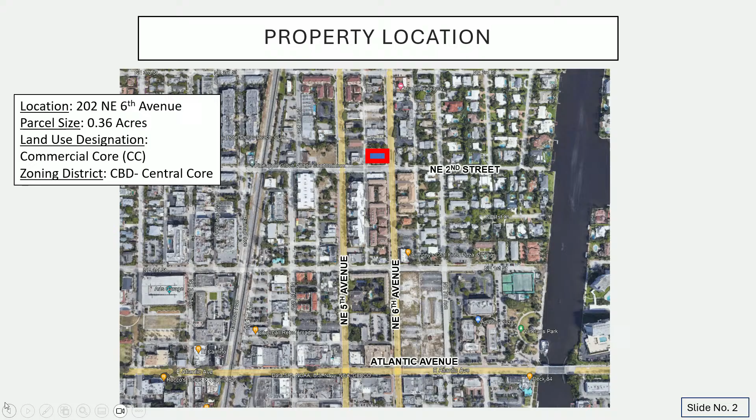As many of you have mentioned, you've driven by the site, so you're probably fairly familiar at this point, but it is highlighted in the red box on the screen. It's located on the northwest corner of Northeast 6th Avenue and Northeast 2nd Street. It's a small parcel, only 0.36 acres. It is within the commercial core and within the CBD. And it is currently developed with a cigar bar called the Smoke Inn. It's been that cigar bar for a number of years at this point. Initially, I believe it was a single family home when it was first constructed, but it was converted to commercial use quite some time ago.

And here's a graphic of the proposed project. So it would be 10 condominium units. It would be a mix of 2 and 3 bedroom units with a rooftop pool deck and amenity area, a little lounge space, space for some entertaining, that kind of thing.

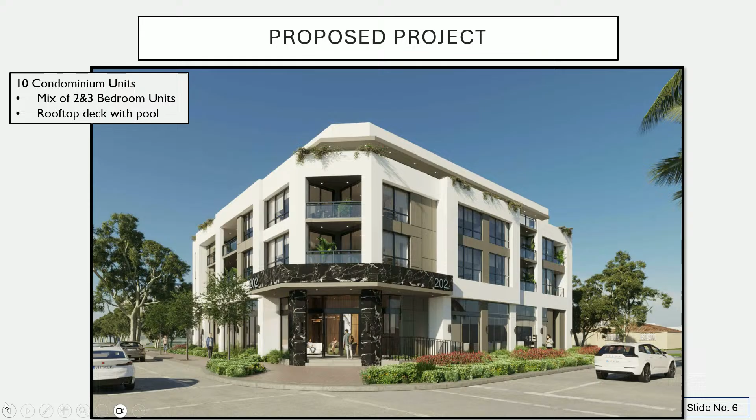What you will notice is the primary streets are activated. So on 6th Avenue, 2nd Street, you do have what looks like active spaces. You have your lobby area. Obviously, the corner of the intersection is highlighted. That's a very prominent intersection, so we're trying to pay tribute to that. And you don't have any breaks for vehicular access along the primary streets. As the code requires, we are accessing the parking and the vehicular use areas through the alley, which again is a code requirement.

So here you have the ground floor plan. The proposed site plan does meet the code requirements and the comprehensive plan requirements in terms of maximum FAR, that's 3.0, we're at 2.92 FAR. We're under the 30 dwelling unit per acre permitted density. We do have structured parking within the ground floor and mezzanine levels that provide sufficient parking to meet code requirements. We have 23 parking spaces for 10 condominium units, so that accounts for the units and guest spaces. The service functions are consolidated within the alley, which is the intent of those alleyways within the downtown areas.

And as I mentioned, we have that uninterrupted pedestrian activity along the primary streets. So as you can see, we have open windows and the ability to look inside into those lobby spaces, and we don't have any breaks that would interrupt those pedestrian sidewalks.

We are also providing lobby and stoop frontages with recessed entries to meet the frontage type standards.

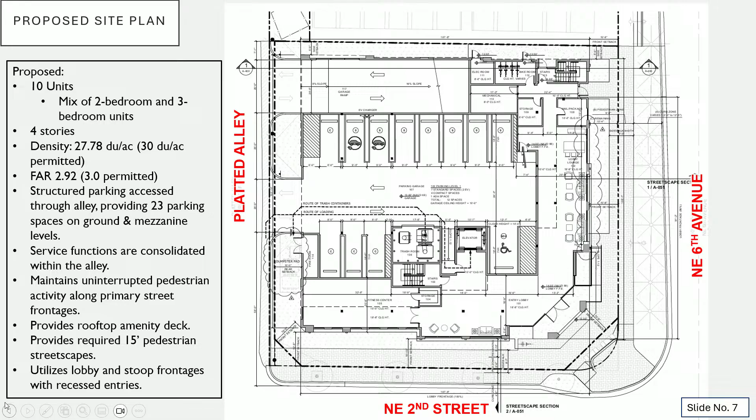In terms of the streetscapes, we are required to provide a 15-foot streetscape comprised of a 4-foot curb zone where you have your plantings, light posts, utilities, and that kind of thing, a 6-foot wide pedestrian clear zone for your sidewalk, and 5 feet of remaining setback.

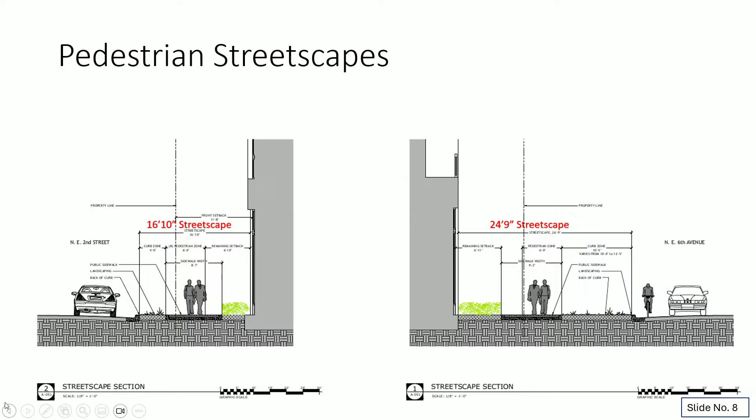We're actually exceeding those requirements on both street frontages. On Northeast 2nd Street, instead of 15 feet, we're providing 16 feet 10 inches, and we actually have 24 feet 9 inches on the Federal Highway Northeast 6th Avenue frontage.

Again, the staff report goes into detail, but we are meeting all of the requirements of the CBD, of the form-based code, in terms of the development requirements, the required bicycle parking, all of those standards, the setbacks, the greater setbacks as you go up in floors. All of that is being addressed and met through this project.

And then in terms of elevations, we did have the masonry modern style approved by the City Commission, the use of the style, and I'm going to have our architect come up and speak to some of the particular details about the style itself.

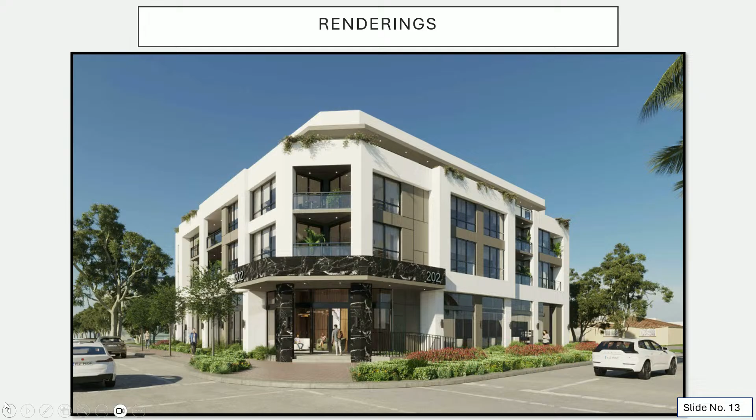Christina pretty much went through the first part of my blurb describing the building, so I'm just going to talk about the style a little bit. As she mentioned, this board did approve the use of the masonry modern style in May, as did the City Commission approve the use as well in June.

So the design highlights the solidity of the building as a prominent mass with carved out terraces and recesses for fenestration. The terraces are employed to create shaded outdoor living spaces for the residents and opportunities for them to also connect more with the neighborhood by being outside.

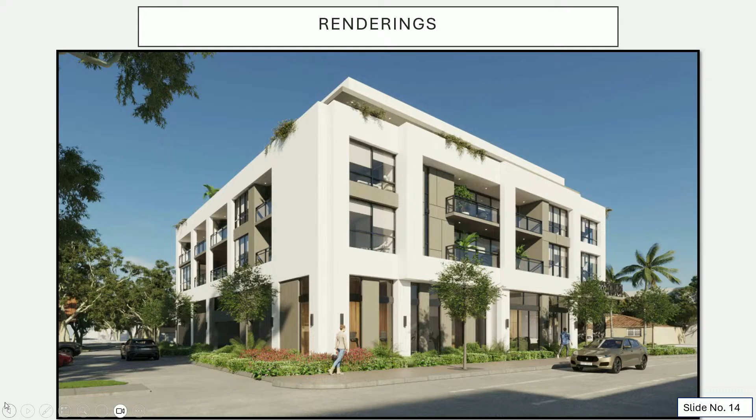These terraces and balconies are utilized on all 3 street-facing facades. Let's see if the next one shows. As you can see, this is 2nd Street and the alley, which also has those terraces and balconies.

Whoops. Sorry, I'm a newbie.

And as was mentioned, the intersection is really accentuated by an expansive projecting overhang to really accent the entrance of the building, and also to sort of anchor the corner and the intersection in the CBD.

So the color palette and the open terraces sort of pay homage to Delray Beach's urban fabric. The integration will ensure visual compatibility with buildings in the vicinity, as was covered earlier. The style has been carefully designed to complement and enhance those existing buildings, considering their scale, proportion, and materials also. We believe that the good proportions and elegant detailing and this sensitivity will produce a beautiful composition and elevate the architectural expression in the area.

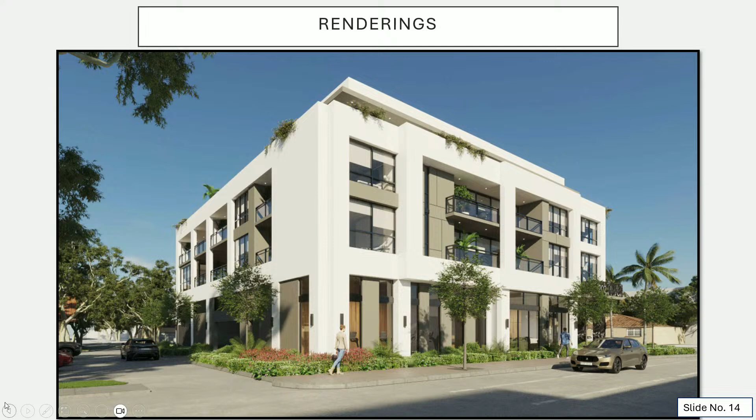And just in conclusion, the staff report details how positive findings can be made, again, in terms of compliance with the comprehensive plan, which I touched upon, concurrency with respect to traffic, water, sewer, all of that has been met. And with that, we would be happy to answer any questions that you may have this evening, and I appreciate your time. Thank you.

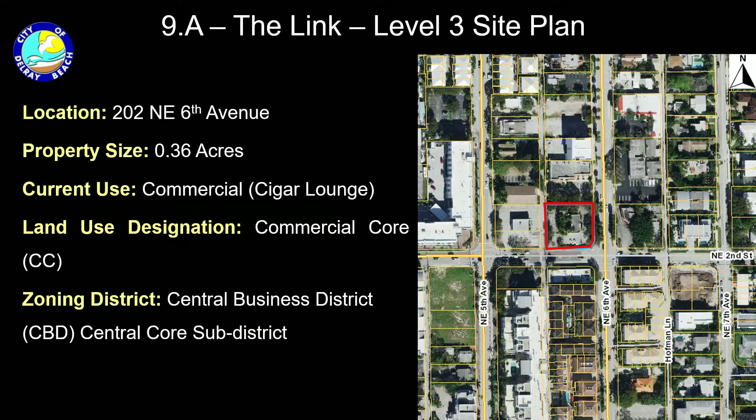It's an aerial view. Again, like the applicant mentioned, this is an old structure, constructed first as a single-family dwelling in 1936, very old, and then it underwent some changes, and more recently has been a cigar bar. Last June 2025, the City Commission approved resolution 107-25 authorizing the masonry modern style.

The masonry modern style required the approval, the recommendation of approval from the PZB board to the City Commission to authorize the style. However, the design itself is within the authority of, and is in front of, the board today. So the style is approved, but the design you can make comments directly towards.

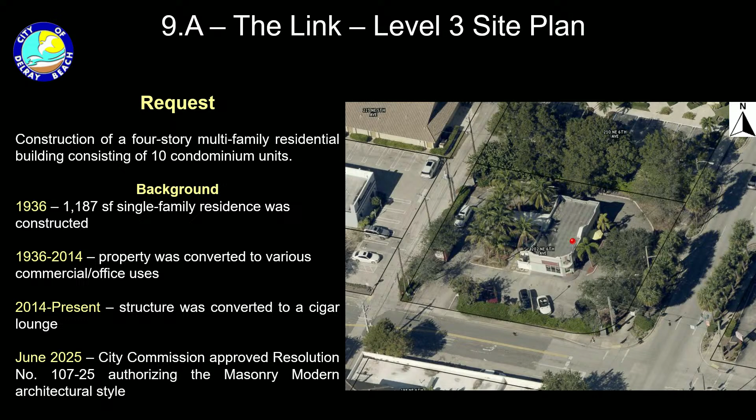Location, across the street. I just want to highlight that across the street from Northeast 6th Avenue, there are new townhouses, also designed by the same architect, known as the Edge of Pineapple Grove.

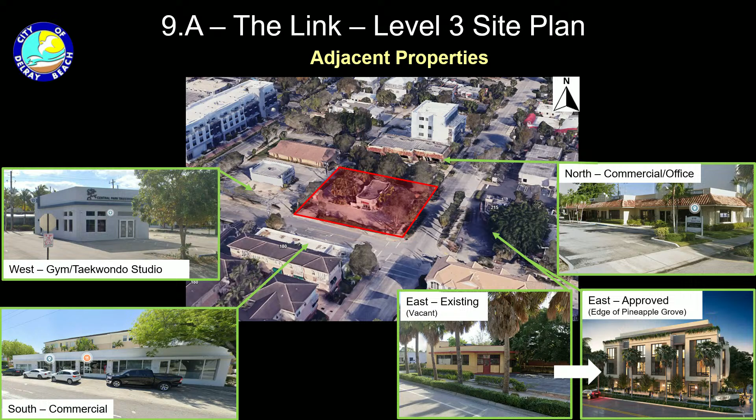The applicant showed the context, so I'll skip through that. The proposal is 4-story, 46,000 square feet, multifamily, 10 dwelling units. The first story and the mezzanine stories are dedicated for parking. Second, third, and fourth floors have the 10 dwelling units, 2 and 3 bedrooms, with a rooftop pool deck.

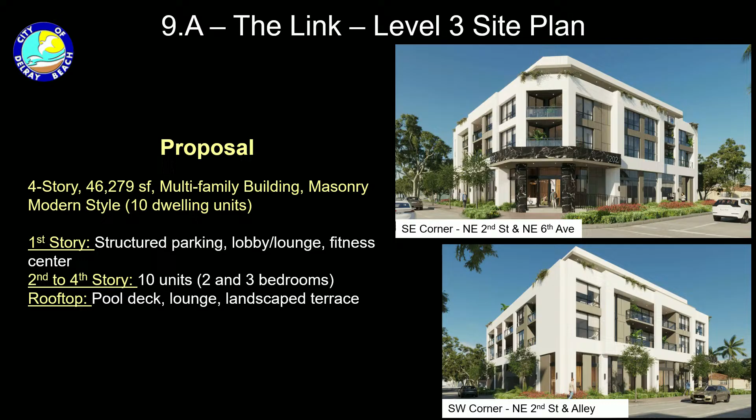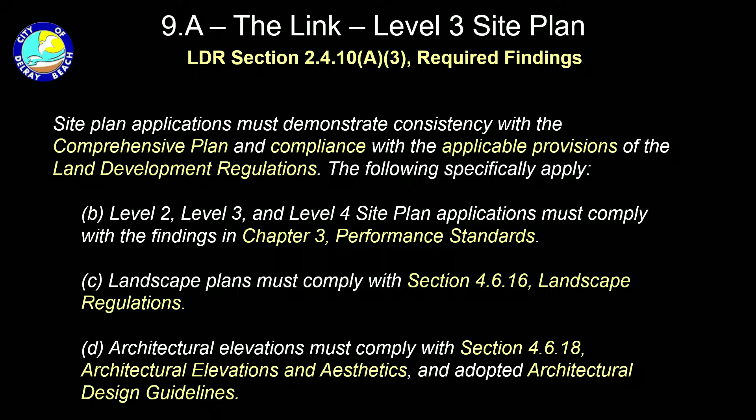It complies with the code requirements. Chapter 2.4.10 sets the review criteria. All level 3 site plan applications need to meet the chapter 3 performance standard findings, the landscape findings in 4.6.16, and the architectural elevations requirement of 4.6.18. We'll go through it quickly so you can see how the project complies.

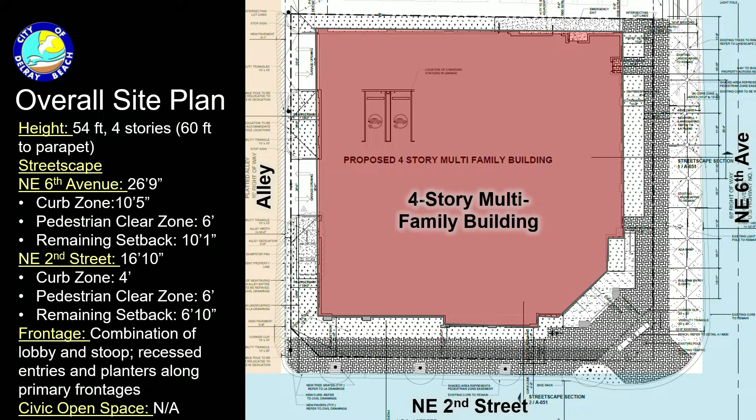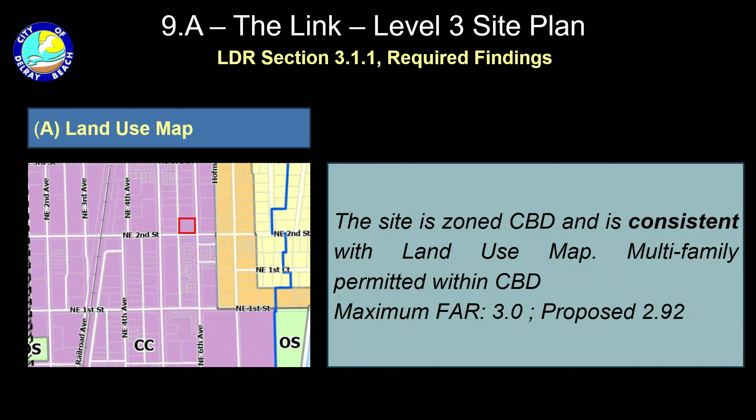In terms of the land use map amendment, the project is consistent with the land use map and the FAR is below the threshold. It meets concurrency. The school SCAD approval is required prior to site plan certification.

Section 4610 requires 2 loading bays, and the project does not provide any. The applicant submitted a request for the board — it's within the board's purview, the board's decision, to waive the requirement if the justification from the applicant is accepted. The applicant mentioned that the loading will happen in the alley behind, shown on the screen. So 2 are required, provided is 0.

In terms of architecture, the style is masonry modern, and the implementation of the style is in front of the board. It's basically masonry with a light color palette, representing simplicity. Same style, same design was almost presented to the PZB, with no major changes, and also to the City Commission, except for the canopy over the entrance with a little marble texture style. This is new.

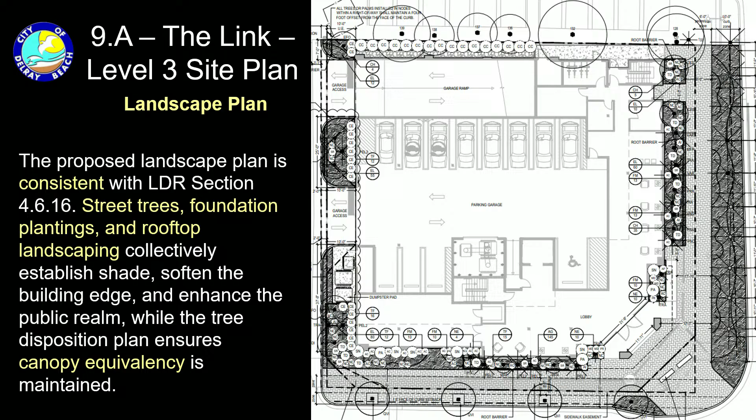In terms of location and landscape plan, it complies with the landscape plan. The landscape architect, the landscape planner, reviewed it and deemed it compliant.

In conclusion, the whole proposal exhibits the defining features of masonry modern: simplicity of form, rational massing. Given the building's highly visible location, it serves as an anchor on this corner, like a landmark as well. The style, again, is masonry modern, enhancing the cohesion of the context.

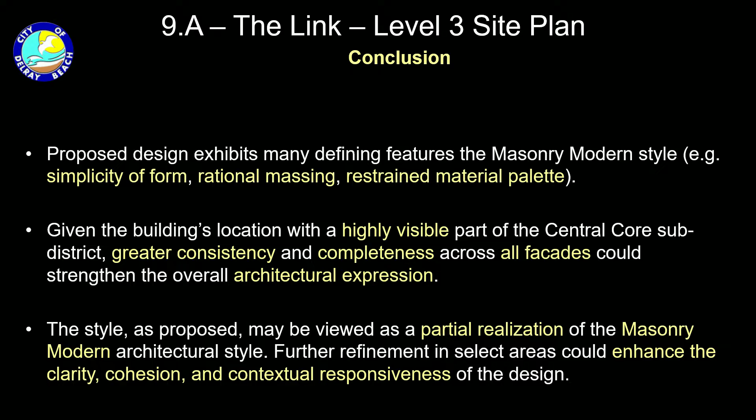It was presented to the DDA on July 14 and recommended for approval. The Planning and Zoning Board recommended approval of the masonry modern style on May 19, and the City Commission approved it on June 17. Here are the board actions in front of you, and I'm here for any questions.

Thank you. Thank you.

At this point, are there any members of the public who wish to speak? Seeing none, public comments closed.

Is there any cross-examination or rebuttal from the applicant or from the staff? Not at this time. None. Okay, all right.

Board comments, let's start with Mr. Katz. I'm curious why you changed from that brown facade to this marble front. I'm just curious about that change. Have the architect come up. I know there were some comments from a former board member about the base separation, but I don't see that — I just see a color change.

Yeah, so actually there were a few other minor changes — in this area we refined a little bit, because I know there were comments about that division from the first to the upper levels, so that was incorporated. And I believe the change to the darker palette for the entry was to make it more visible and really accentuate it on the corner and the intersection.

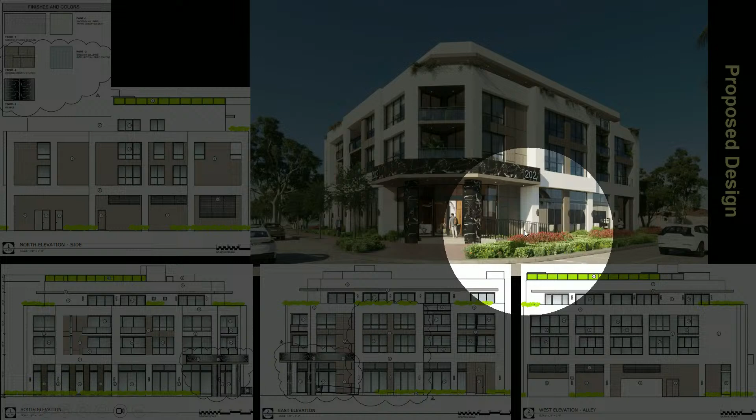Can I just quickly ask, is that like a sculpted railing kind of thing, or is it a solid piece? Above the entrance — you're talking about the black stuff on the supports for the entrance, the marble? It looks like it's almost a railing. Looks like a railing there, sorry, the black thing above the entrance. So that's actually an ADA ramp. No, oh.

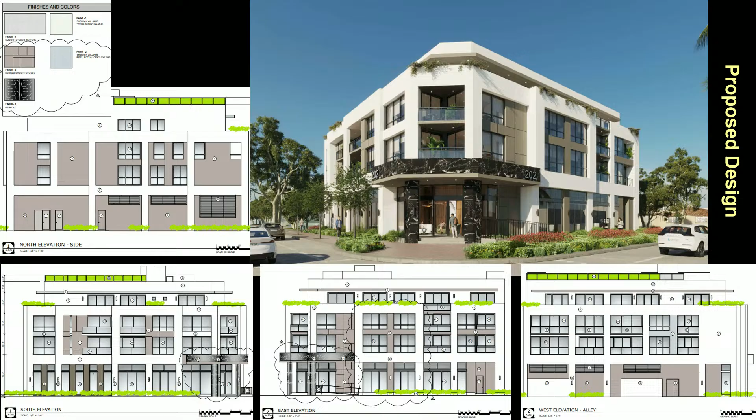Above the entrance, those are pretty much glass railings with metal on top. They're solid, not glass, not ornamental like a carved wrought iron railing. It looks like a solid glass panel or polycarbonate panel with a metal rail above it. It just looks like a railing to me.

I know you had some direction on that. I was curious if that's what you were trying to do. I don't know, I'm not crazy about the color, but I'm not going to live there, so otherwise I'm fine with it.

The only comment I'll make, in general, is to remind the city that every time we get rid of a commercial property and add residential instead, we increase taxes on our residents, because as we eliminate our commercial property base, we eliminate our most thriving tax base, and then we have to raise taxes like they had to do last night. This isn't a comment on the application itself, just in general, for the record, staff would like to try to discourage this type of change.

Is that it? That's it. So, Shard.

I'd like to address the building as well, but I want to start with the landscape plan. It concerns me in a number of ways. The first is removal of existing canopy. The second is the diameter of the plants being used to replace the oaks and mahogany that are there now. And the third is the justification for removal.

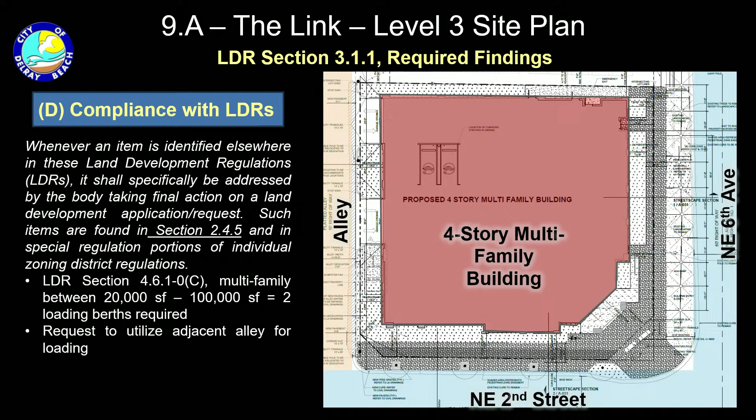I don't know if the city should address this or the applicant. I'd like to know why we're going from trees that are 12, 14, and 16 inches diameter breast height down to 2-inch calipers. I'd like to know why this design basically shows no trees at all. If you drive up 6th Avenue, you see more and more trees being destroyed. So the rendering does not particularly represent the landscaping that will be there. If we showed the trees, you wouldn't see the building, okay?

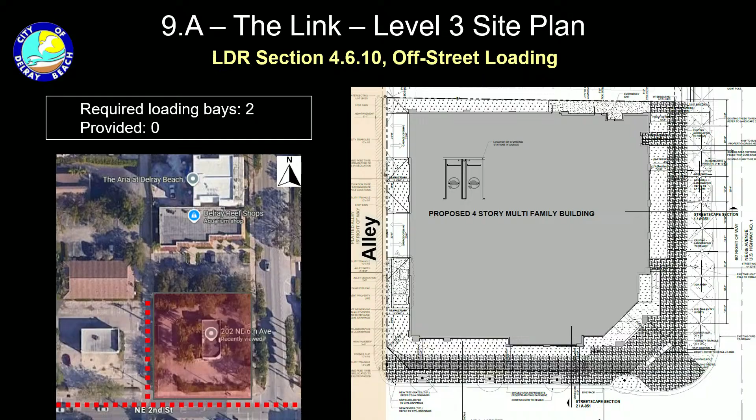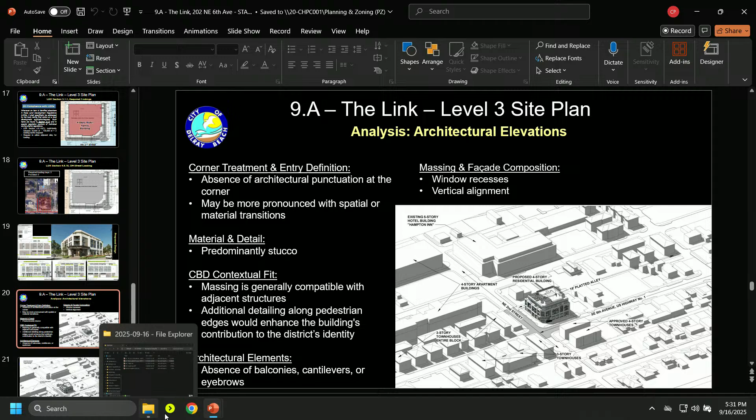So in the landscape plan, if you could go to L1.1, well no, 2.0. Oh, we have it? Okay, so a majority on the, in the curb zone, where'd it go? Okay, I keep doing that.

In the curb zone along here, along Northeast 6th, a majority of those trees are the existing trees. The reason we left that whole landscape island as it is existing is there will be some trees added to infill where there used to be a curb cut and driveway. Along Federal, that whole row of trees will remain, and then we'll have newer trees to infill the areas that didn't have trees before.

Does the blue marker on the trees today mean that they are going to be removed? Because some of those have blue markers on them. I don't believe that's related to our project. This is FDOT property.

Do you know about the trees? Yeah, I have to be sworn in. No, you were sworn in already. Can you say your name though? You weren't, I stood up. Nick Netta, President, CEO of Netta Architects.

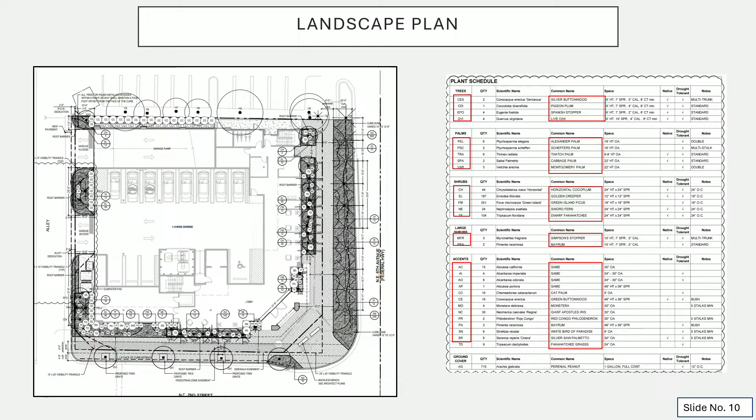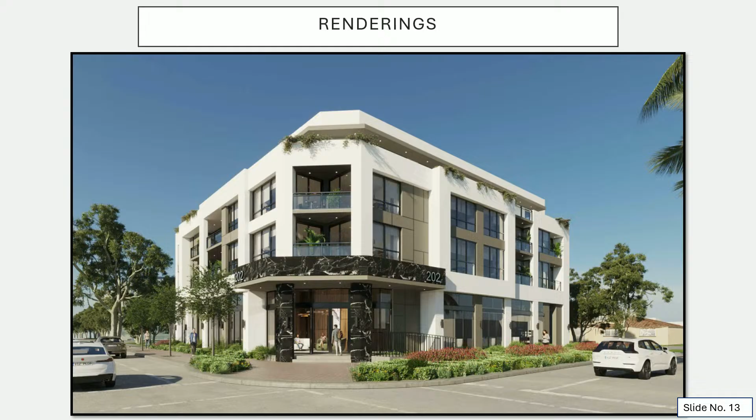I went to the company's website and looked at some of the projects they've done - there are some very impressive projects. This one, I think, falls short of that, and this is a very important corner. I think the black and white marble confuses me, though I don't know what was there before since I wasn't on the board then.

I did want to say, first, I'm glad I didn't see any waivers or variances, so that's positive. I was happy to see that too - usually when Ms. Miskell's involved, those tend to pop up.

But if you look at the staff report on pages 12 and 13, it makes some critical comments that I think would be easily resolved. There's talk about the palette and an absence of contrasting elements. The static roof line lacks visual interest. Where the massing turns a corner, the treatment remains plain, lacking the architectural punctuation often associated with signature corners of urban counties. There are several other comments I totally agree with.

I think this is really an important project, and I would like to see these matters discussed with staff. But before I go on, I did want to ask a couple questions about the roof amenities.

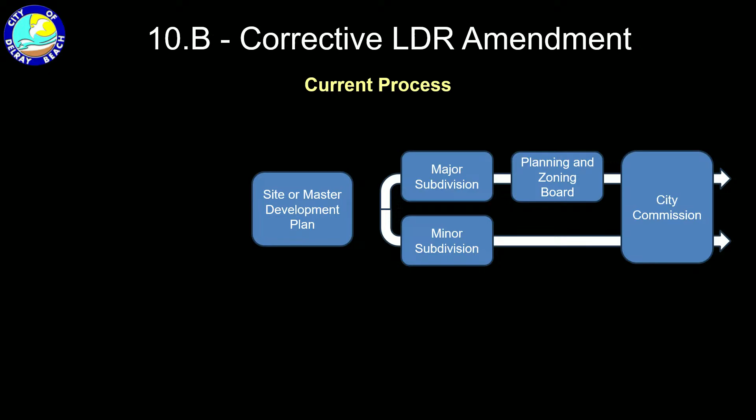So the current process now for a subdivision plat is site or master development plan, and then you would go major or minor subdivision depending on the route. If it's a major, it would come through you all and then go to city commission. The minor subdivision would just be on the consent agenda at city commission. But that's not always the case, though.

So we have situations like with the 3900 Sherwood Leighton Point project. They were not a planned residential development, so there wasn't a master development plan associated with it. And then we have a few odd plats here and there where there's no site plan before it. So to capture this loophole where we have to approve it administratively, but wouldn't have an avenue to do design review to make sure the proposed layout is functional - we still need an avenue to do that.

So we're proposing a subdivision plan, which is used to establish the configuration of a tract of land with the common area landscaping prior to the plat going through for the administrative approval process.